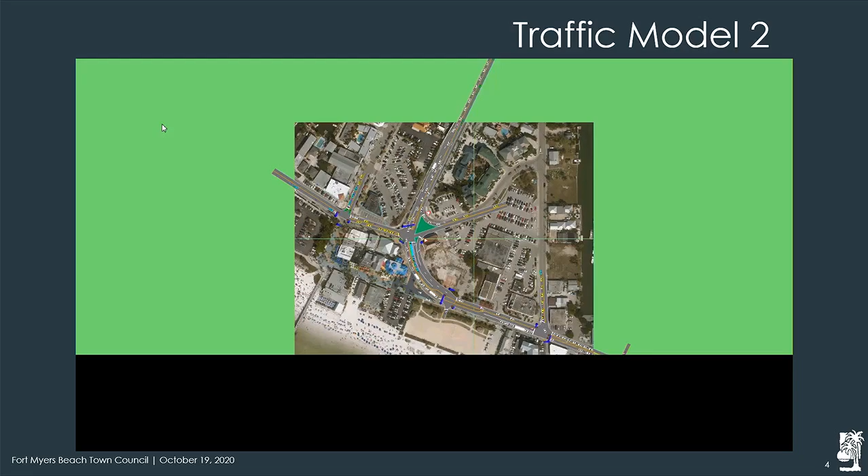The third model was what we called a beach oval. It was the model that seemed to work best given all the circumstances and the traffic volumes we put into each of the models. You can see it's split onto the Seafarers property. Could you explain that one in detail? I don't think we can see it, and I doubt the people at home can either.

That model breaks out the off traffic leaving, with a new light that splits the traffic leaving the property. Again, that model splits the off traffic leaving the beach off to the right through the Seafarers property, and traffic coming onto the beach goes around there. So it leaves kind of a big infield in the middle, and with a new traffic signal scheduled at Crescent, a new one at the base of the bridge, and a new one at San Carlos, Old San Carlos and Fifth, we can coordinate those three traffic signals together and keep an eye on everything. This model seems to make traffic move the best of the three models.

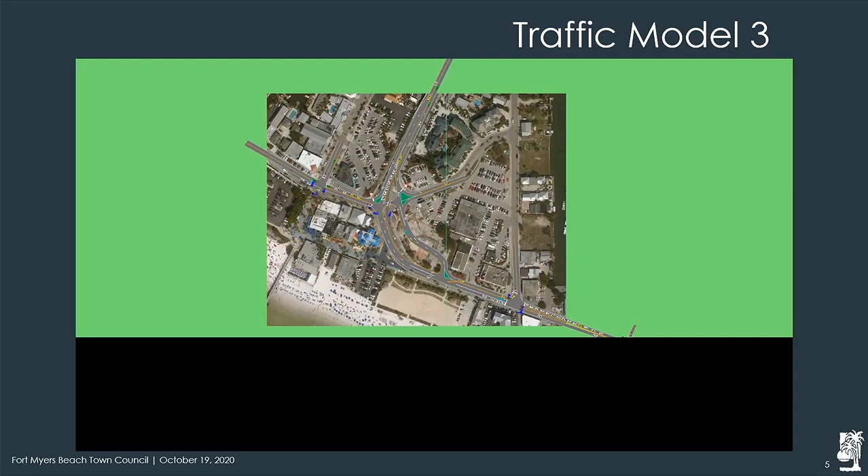With the modeling that we just showed you, it gives you an area in the infield there, some kind of landscaping, some kind of beach landscape. And again, FDOT has this backed up a little bit. They've made some minor changes that you all get a look at, and you'll get to comment on here directly.

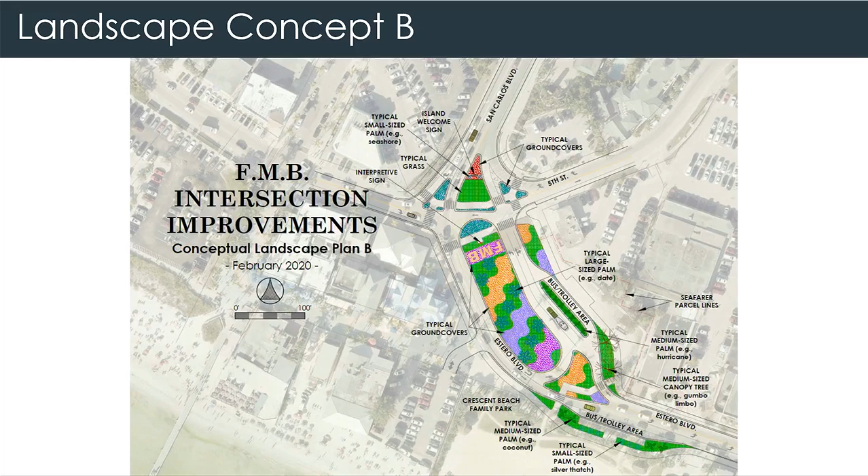This gives you a landscape potential for the middle there. You got another - these are just what we put together as potential landscape options. None of these models that you just saw will work in first season peak hour. The one that works best the other 10 months of the year was the one that we showed you. I don't want to get you thinking that one's going to work.

However, I do want to say that what FDOT's doing - if you remember the PD&E study they put on to show everybody - they've chosen one, which is what we took and made that model around, and then they've chosen what they call Island Alternative 2. So FDOT's going to come down and build this oval, but it's going to be part of a much bigger job.

We're going to start at the Hurricane Bay Bridge, the other end of San Carlos Island. We're going to restripe that, narrow the lanes to create a pedestrian path on what would be the west side there. They're going to get rid of the metered signal at Buttonwood and make it meter only when necessary, only in peak hours, and it will operate just like a regular signal the rest of the time. We're going to add a new signal at Main Street.

We're going to widen the Matanzas Bridge to the west side and add a bike path across that bridge. We're going to restripe the bridge to 2 lanes on, 1 lane off. We're going to redo all the roadway lighting. Then they're going to build that oval that we just looked at, that everybody agreed on, at the base of the bridge, again with a new signal at Crescent, a new signal at the base of the bridge, and a new signal at Old San Carlos.

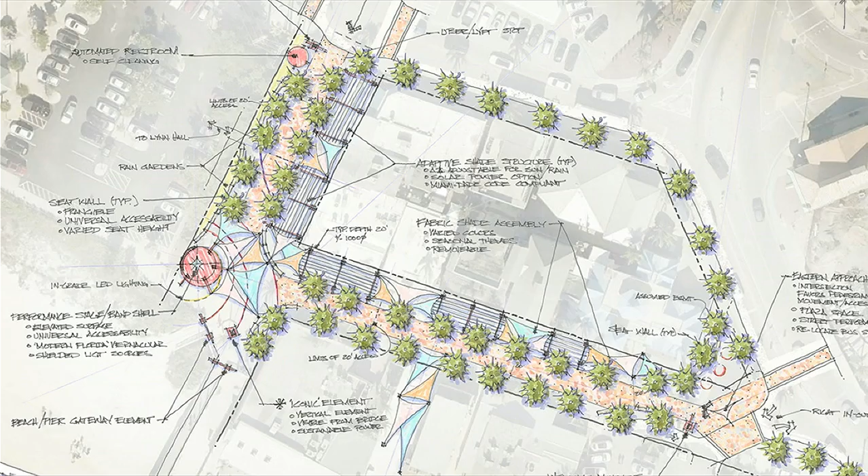So a closer look here, some aerials. This was the original concept plan that we came up with. Man, it's been about a year now. We've got the shade structures, the shade sails, the landscaping, hardscaping. And we'll talk a little bit about this area down here with the parking coming off of Estero.

The seat walls, we've got the hardscape shown in here. While we're talking about the hardscape, absolutely, we are going to make the drainage down here much better. If you can see along the tree grates here on either side of these two boulevards, you're going to have trench drains. We're going to take all the water in from both sides, and they'll run out. We're oversizing the pipes and pushing it down to Estero.

Just to clarify, I think you mentioned before that these louvers over the seating areas actually close. Yes, if that's what we end up purchasing, that's what we will do. So that's an option at this point. I think the way we presented it was that they do articulate so that you can pull shade in. As the sun's overhead, they're flat. As the sun sets, they kind of go with the sun so that it always creates shade underneath.

And then in the event of a rainstorm, they can close. Alternatively, they could just be solid and open, depending on budget. I don't think it's going to be an issue. We've priced this thing out with the articulating louvers, so I would guess that's the direction we're moving, but at the end of the day, it's what the bids come in at and budget will allow.

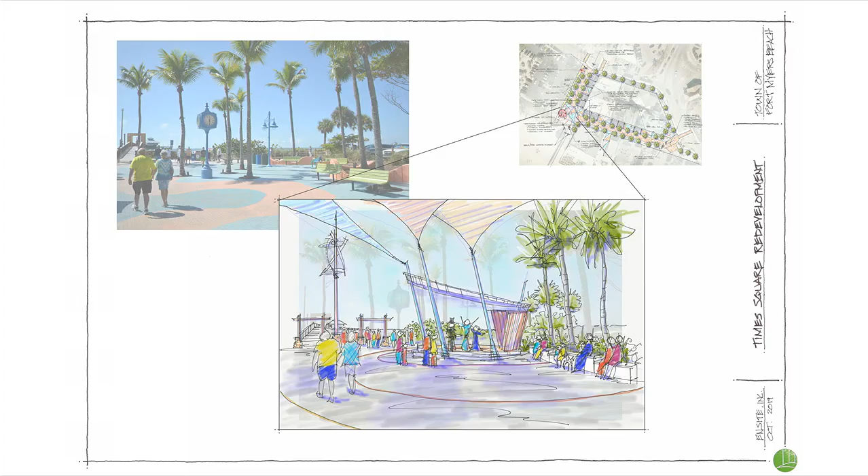Paul, I think what's clear is that one button turns them all closed or all open. Right, yeah, they're all individual. There'll be sections, and one section could be open and one could be closed. Sure, it could be wired so each individual store could have their own button to put it up and down.

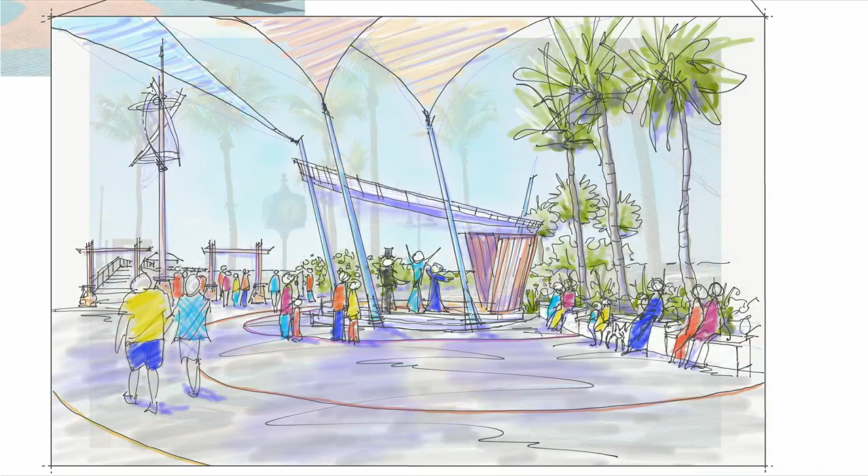Absolutely. Right. Yep. So this was, again, some of the original pictures we've got. We'll zoom in here. This is the dock area looks like right now, with the pier approach in the background. Again, this is before the new approach was built. Then we moved to this artist rendering here of what it might look like, and then a more computer graphic version.

So what I'm saying here is the progress we've made thus far: we've got actual three-dimensional shade structures, shade sails. The stage is all but final design, ready for construction. And we've actually looked to make sure that all these columns line up with those businesses, so you have good lines of sight coming out. We're not putting columns directly in front of your doors. We want to make sure there's good ingress and egress.

Again, we talked about the safety of this area going back about a year now. These are 20-foot wide aisles between the trees so we can get fire trucks down in the event of emergency. And we'll have removable or collapsible bollards at the ends to allow emergency vehicles to come in, but also to restrict traffic on the pedestrian aisles.

This is another view here for scale. There's the FMB sculpture, if you will - it's an FMB logo there. Another picture that shows that a little later in here.

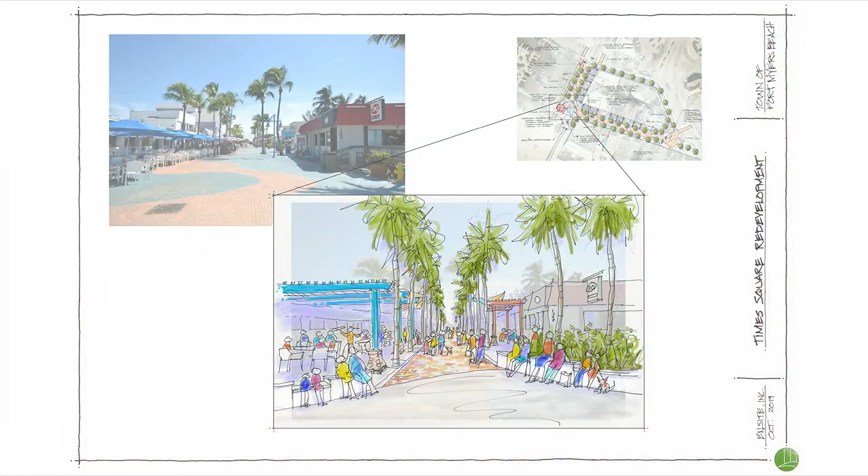And this is what it looks like now. That was the artist rendering. This is where we're at with our model.

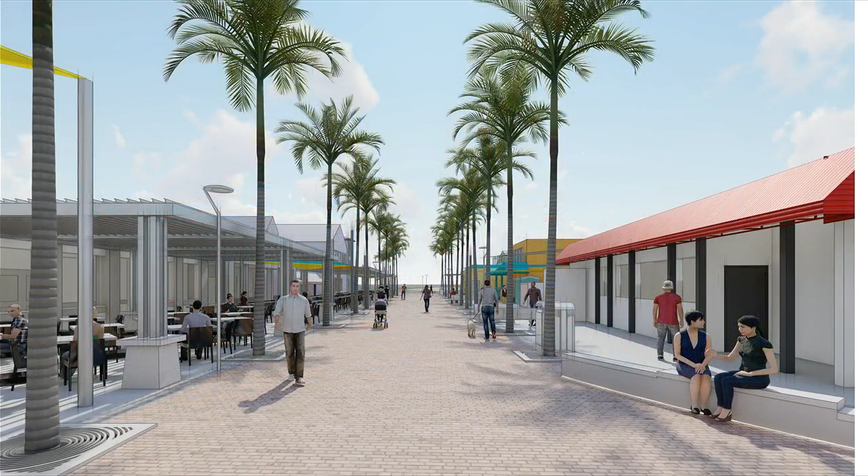The seat wall that we discussed, if you recall, we put it at varying heights so we can accommodate people of all sizes and abilities, and they're also spaced out so that you can't really lay down on them.

Elevation changes. Things to look at here: the lighting, that's definitely a concern. These heads have multiple color temperatures, so outside of turtle season they'll be brighter and whiter, and during turtle season they'll be that amber color. Those can also be on a timer schedule over seasons, so you don't have to go out and change a bulb. There's just a different LED panel that is on and off.

On this shot here, this is just a question. I don't claim to be an architect by any sense of the word, but where the main sail, the FMB sail is, the base of that is square, the stage is round. Seems odd, it just doesn't... is there a reason why that's square and not circular to match the stage? I'm not an architect either, I'm on the engineering side. We design around what the architect wants. I can definitely throw that out there as an opportunity to change that.

To tie in also to your question, the black band, the crow's nest look there at the bottom of the sails, that's round, and that would have the time on it. I think we talked about having different messages, maybe Happy New Year, Happy St. Patrick's Day, etc. So that's a variable message board that you can put some different messages onto.

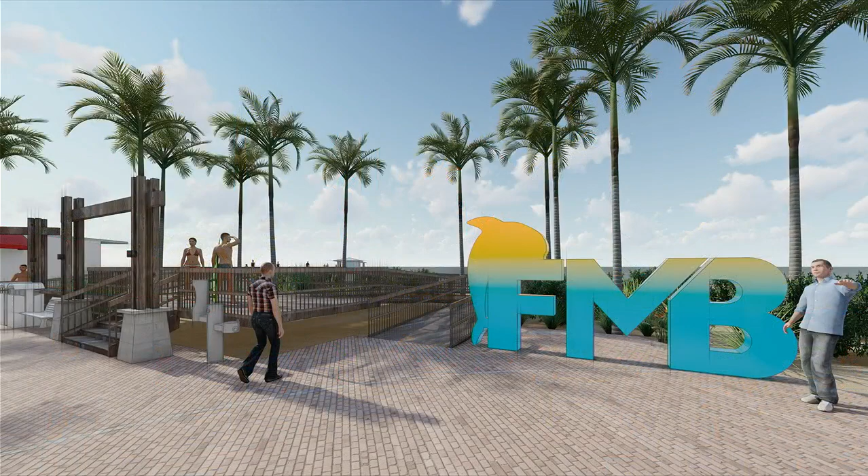Again, for scale, there's the FMB logo at the new approach to the beach. One thing we've done too is you're out there right now, you see there's a big slope coming off the pier and going down towards, say, Plaka or down past in front of Dairy Queen. Actually elevating that up a little higher than it exists now, maybe 8 or 12 inches.

That way we can get that view back. I'm sure you guys have seen the view has been diminished with the handrails that come in from that new approach. So we're trying to elevate that ground up, and then what that gives us is more ability to slope down into the drainage, so we're going to get more positive drainage out of this.

If you could just stay there real quick, that FMB structure, that's an optional structure at this point, obviously, right? Yeah. Because does it impair the view of the ocean to some extent, or is it? Well, I think we have another view here. So this was kind of the question we talked about earlier. Does that stage certainly add something to the... It adds something, but you can see through it. There's the FMB logo. This shot is taken from about 5.5 feet tall, looking out over the horizon there.

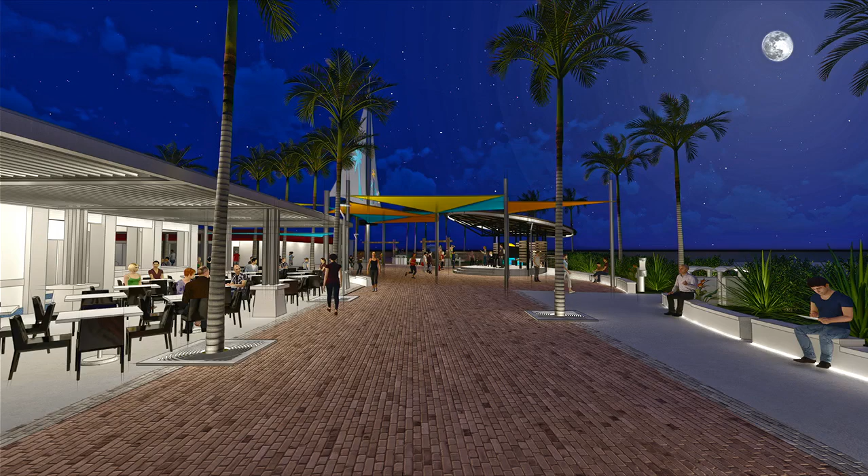Here we are looking maybe halfway down the street, down Old San Carlos. That's what it might look like at night. Is that showing? Looks like there's lights inside the band. They have an LED strip inside.

Will the toe kick lighting along the seat wall and all the uplights also be color changeable like the overhead lights mentioned earlier? They can, if they present an issue, but from what I understand, because they're uplights and not a direct source, they don't need to change.

If it's a direct light source, the turtles get confused and think it's the moon, whereas if it's a splash of light, an indirect or diffuse light, then it's not an issue. It almost looks like that circular light around the stage is being used to illuminate the stage.

I could see a potential problem with it causing an issue with the turtles. Right, so it could change color temperature. Those can change, yes. I do think any kind of white light glow can disorient the turtles, because the moon isn't always really visible when they hatch—sometimes it's behind clouds or something like that.

I do like the trees, and we have to take public safety into consideration. When you talk about the color temperature of these lights, it looks nice and warm, but it could also be a trip hazard if too dim. Conversely, with the dining area, when you go out to dine at night you don't often have bright white lights—fluorescent lights aren't sought after in dining areas, so a warmer light is usually what restaurants use anyway.

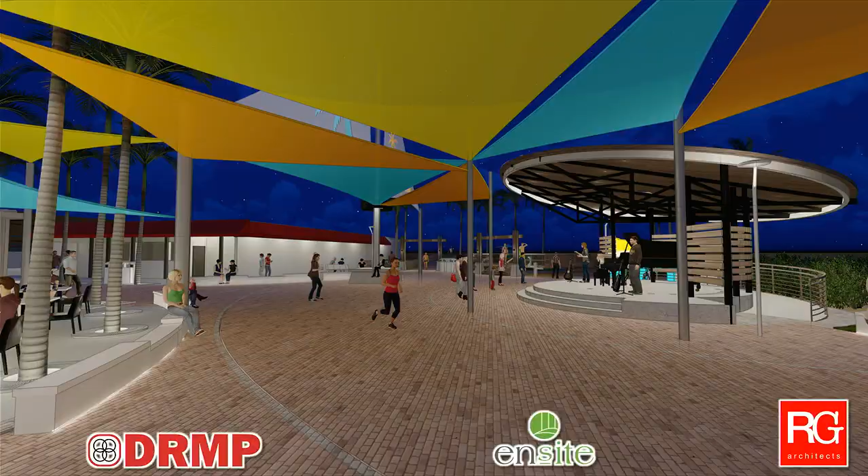Okay, Paul, are you done with the Square? Yeah, I'm good with it if you guys are good. So that's just the update there. Yeah, let's just be clear. So later in your agenda, we have an item to move to the next step. The thing we didn't talk about was the parking situation that one of the gentlemen brought up. So let's just address that now. Sure, actually, put that back up. Sorry, guys.

Back to Times Square. So real quick, I'll just talk about it. Our original artist rendering showed pulling that out. We're providing parking through the driveway to the parking spaces to the south there. Right now you have the trolley stop here, and vehicles come in and out through here. You've got vehicles coming into this parking lot kind of haphazardly in and out, and then you've got three spaces here. The original concept was to try to pull all of this out and make this more of a pedestrian area. We're going with that until we could...

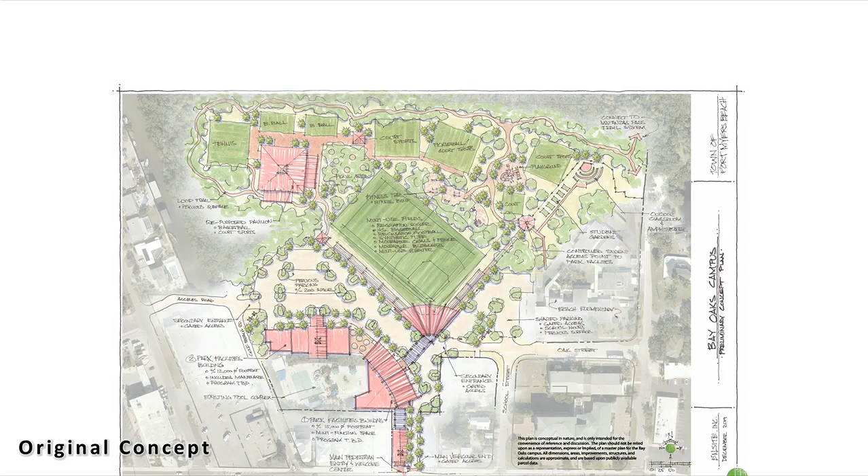We're going to show how we kind of walk through some things here. We have a couple of buildings that were looked at: one's a community-oriented building, and then also an athletic building, maybe a gymnasium, replacing the old recreation center. Some of the key things here also were the amphitheater, the multi-use field, the trail, the sharing of the property with the school, the outdoor classroom, and things like that. So also there's an entrance off of Estero. This was the second concept that we came up with.

We looked at moving the small baseball field over. There was some conversation about that, and then we looked at pricing on this thing, and this thing was way out of budget, if you recall from our last meeting.

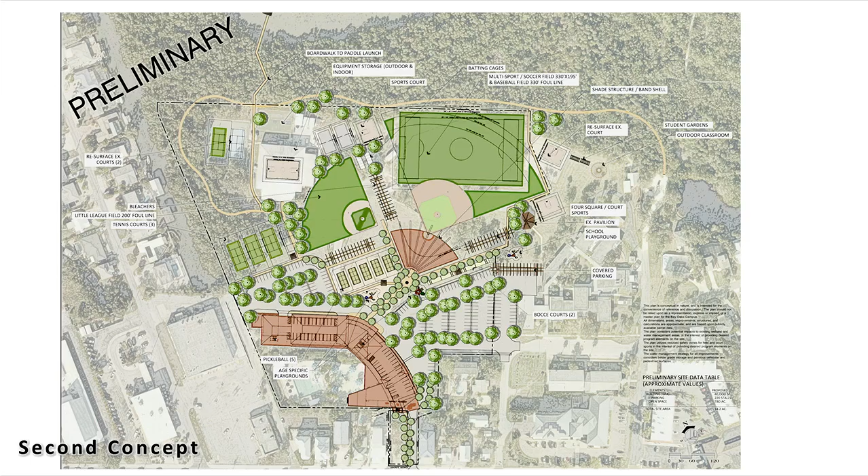So what we did here was work with town staff to make a modification. We took away the other two buildings and combined them into one. So instead of having an athletic building and a community building now, we're basically keeping the athletic building and the existing recreation center, and having the community building and the amphitheater combined as one for construction and budget efficiencies.

We have a roundabout in the middle to try and slow traffic down. We are still looking at having the entrance only off of Estero, and then also the egress off of. And this is where we're at from a CG rendering for this building.

What's the square footage of that building? 14,000 square feet. Will there be anything on the first level? Yes, there's a concession area and restrooms.

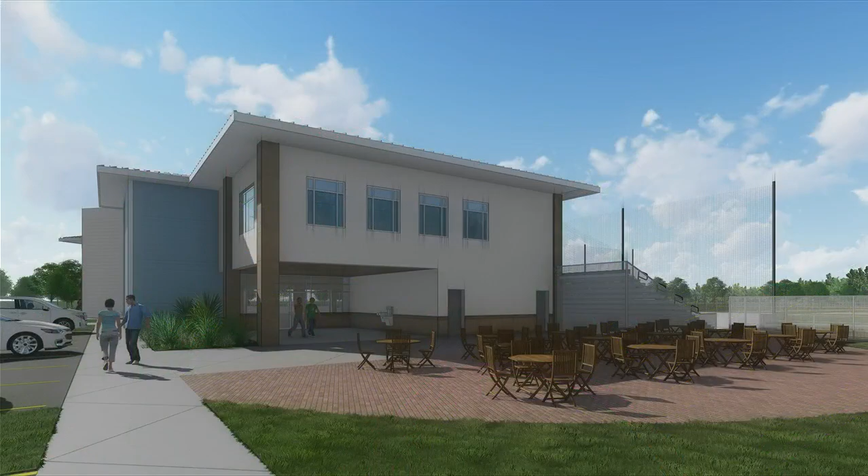Is there any storage for the Little League? They've got a lot of storage facilities now. Is any of that built into this building? What we have existing stays. Oh, the existing? Yeah, for this phase. Really? So if you could go back and point where that would be? Yeah, so the existing Little League is back. Wait, are you talking about the storage for the? Yeah, it's underneath the back.

You're trying to say the existing concession stand and storage that they're using is staying? Yes, that's all staying down there in the bottom. On this one, there is room for concessions underneath and bathrooms. I guess I should have brought the floor plans, huh?

Before you go on, one thing you said before is you're looking at an entrance on Gulf Beach Road. Yes, and there will also be an exit. Ingress and egress is how we have it. Even with the traffic circle during season, people are going to know that they can bypass the Estero traffic by coming down this way if you have an exit on that side.

Right, we're looking at access control issues. As you know, the current exit is a removable bollard, so we're not locked into permanent open access there if that becomes an issue. The FMB sign down from Times Square - there's opportunity here to adjust that parking area and the path through it. I would tend to want to leave it as designed here, and then if it becomes a problem, we can address it.

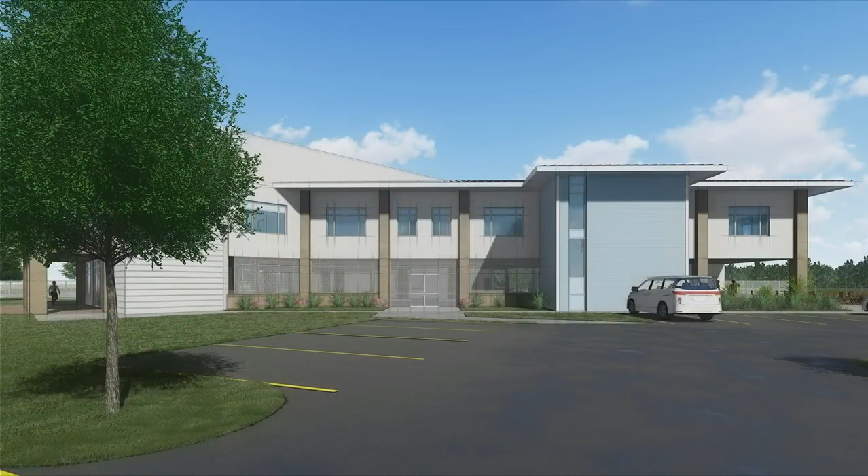So really, the questions we had for everyone here is the architecture of this building. There are some options to look at. Talk about the programming - it's got flexible space, it's got two wings. One's more for younger kids recreational stuff, and one's more geared towards adults recreational activities. They're separated by a wide open area, and what that does is keeps the noise down from one to the other.

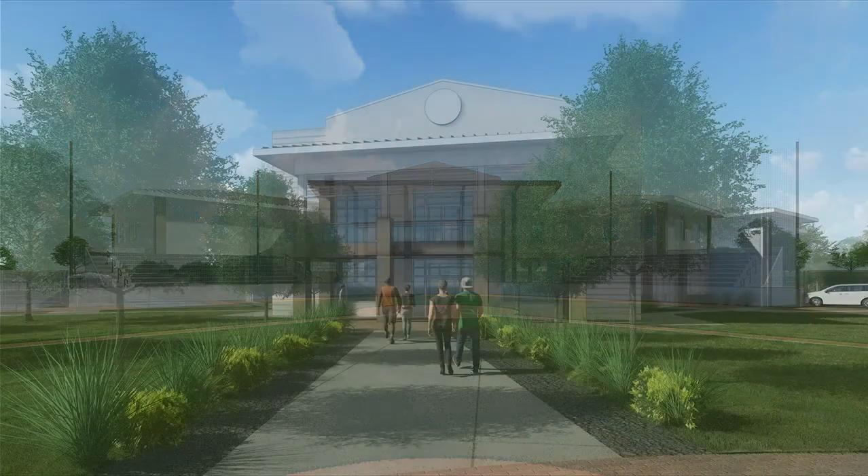What the building might look like from the back. Looks like Terry Park. So where we're at right now is, this is an odd one that we're looking at here as an option.

I'd like you guys to kind of weigh in on what direction you might like to go. This looks like a Greek temple - you've got a round sun there. I think it would have the logo on it or some variation of that, maybe. This is more of a dome shaped, looks more like an airport hangar. And then we went with more of an offset, asymmetric version, and that tower there is actually what houses the elevator.

The elevator exists in all three floor plans, it's just getting a little bit funkier with the design here. The cost is essentially the same between them. Can we see those three again?

We had originally a aluminum or metal roof going over this thing. We opted for a flat concrete roof instead. You'll be able to see it better in one of these pictures here. So this is why we're kind of showing you that facade that you might see from the ground.

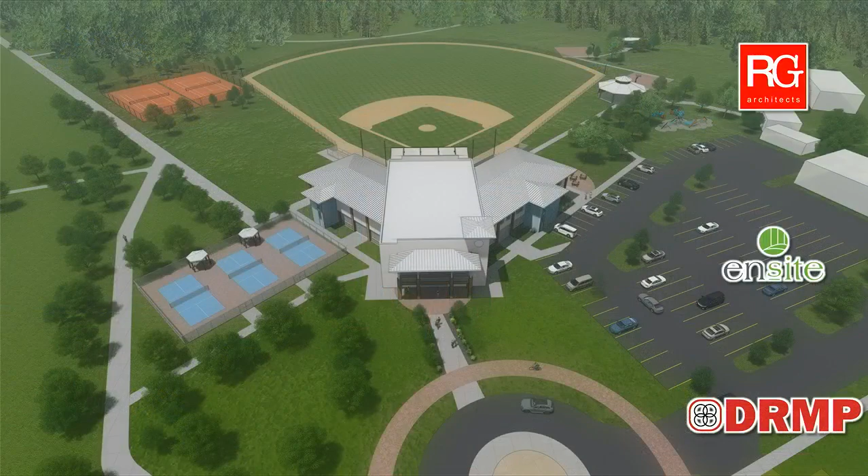Why did you choose that flat roof? Waterproofing, and it's a little stronger in case we wanted to use it. We wanted to set this building up so that we could stay there on a floor if this building got damaged. Generally you don't use flat roofs, but we wanted to create basically a concrete structure within the structure so that we had some continuity of services if this building were to be damaged in a hurricane.

I think the entrances are all, it's like you're walking into a mini stadium there, Hammond Stadium, which is very inviting. I don't know, the council can decide. I prefer that one myself, the asymmetrical one, with the elevator shaft on the side.

One question, I don't know if you've been part of this conversation, but where the arches are, there's some of this old coquina stone. Is there any way from your standpoint to incorporate that in a way that does not become burdensome from a construction standpoint? I have not seen the material. I heard it's stored off island. I think it would be cool to see some of that historic material be reused somewhere. It's not something we've contemplated at this point, but with direction from council, we can.

The bases at Times Square, right, that we use. I don't know if that could be used there, but the idea, not the actual stone, but the look. There's a similar look to all the pedestals at Times Square. I recall the original design from some time ago. I can pull it up again if you want to see it.

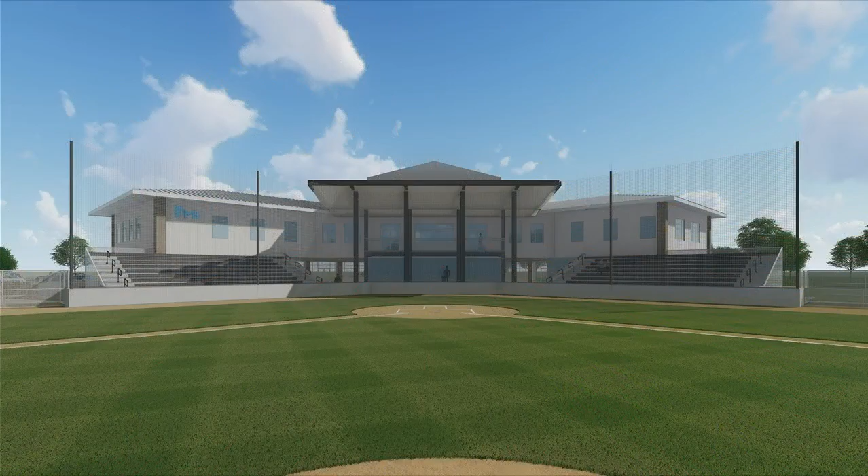And you mentioned BORCAB. Has this information been disseminated to the BORCAB group already? No. So we went through our 30% submittal with town staff, and then we paused until we can get movement to move forward with the next phase to bring this thing to 60, 90, 100% plans, construction documents. This is the first time I'm presenting it outside of that 30%.

We're going to 60 on this one. Is that right? That is the next step. The supplemental task authorization for you now is to go to 100%. They'll have a crack at it. Yeah, those are built in there.

I think it's important to understand how these projects get done. We welcome the input, but we're basically at the stage where people see it at 30%. Next stage is 60%. Everyone, all the stakeholders, will see it again at 60%, see it at 90%, and then the final plans. We don't really go too much in between those 30% bumps, because if not, we'll be fighting over the shape of the doorknobs forever.

Just to summarize, we wanted to set up the building so it really would be the community hub—someone who says, I don't know what I feel like doing today, could go to that building and engage with someone and find something to do. Not necessarily that you had to be going there with somebody to do something. That was the concept, that you could just go there and engage with someone, do some programming, or just sit down and play gin rummy if you want. So we're trying to create the spaces to be as flexible as possible, to create this community center of the town.

I'm sorry, Mr. Mayor. Paul, real quick—so when you were trying to get our input on the facade, and we saw that beautiful approach to the building, is that the space that's on Estero Boulevard as well? No, that's if you were looking from the roundabout in the middle of this picture here. What's envisioned for the space in front of Estero at this point, or have you decided?

Yeah, so it's going to be landscaped, and it's going to have this National Fitness Court. Unfortunately this is trimming my PDF so you can't see the bottom, but it's got that National Fitness Court there. We're contemplating shade sails, shade structures there, and there'd be monument signage. Really the nice thing about it is it shows where Bay Oaks is—Bay Oaks is a recreational facility, we're promoting healthy activities, and it's right there on the boulevard. You'll be able to see it and know exactly where to go to get into the park.

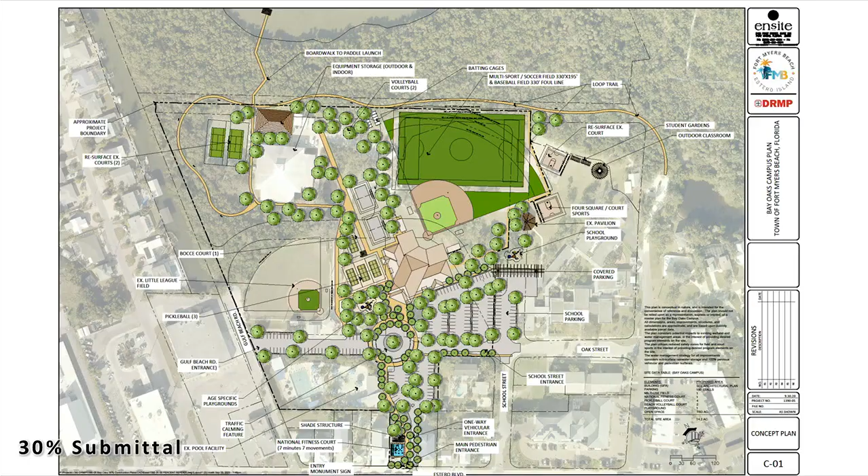Okay, Paul, let's move on. Did anybody care about one of these facades while we're here? Any strong feelings one way or the other? I think I heard the asymmetric one was Councilman Allers and the support for the asymmetric. I'd agree with that. I'm not going to argue with the engineer and a builder, but there you go. We'll go with that one.

So we'll move on to Bayside now. So, dramatic first page on Bayside, by the way, with the big red X. That was very...

We talked to everybody in town. We've heard lots of input from everybody around the area. We heard now where we stand is we want to have a stage area and shaded viewing space. We want to have native materials. We want to have potentially that rain garden and consistency with Old San Carlos and Times Square.

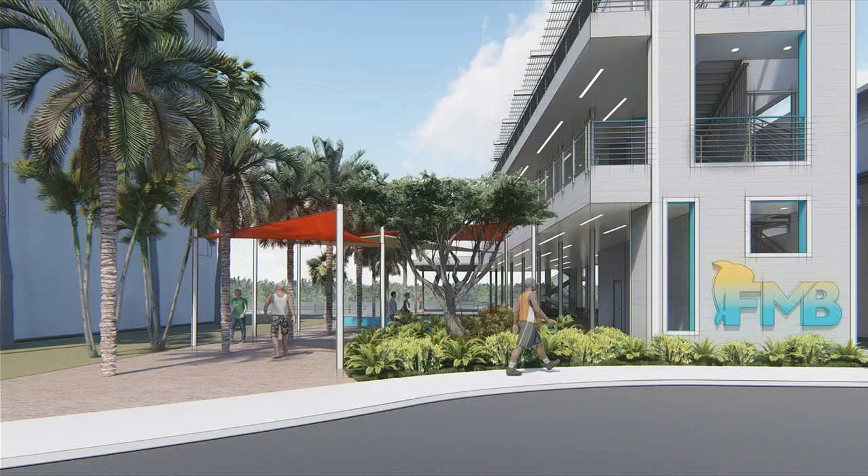Again, this is what that area looks like. Our original design, this was presented to the previous council. It had a stage, it had solar trees, a splash pad, and it sounded like we just didn't have enough to continue with that splash pad. We went to this design, which had a building which housed some of the upland facilities for the mooring field, shaded areas. We had a stage in the back, if you remember, and then that got killed.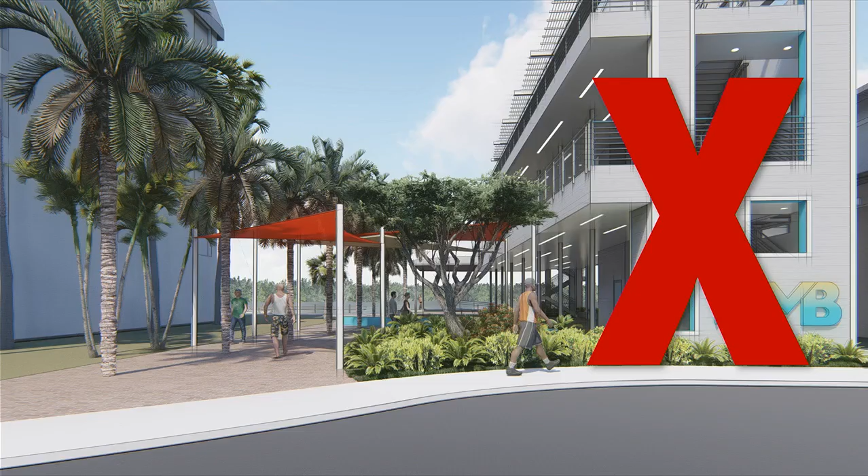Paul, could you go back for me to the original design that you had up there? Mention this right there, the one on the bottom left. I seem to recall that most people were in favor of that. Maybe not with the splash pad, but the openness of it, the tall trees, the sunshade - you still have the stage, but you could still see through there. Other than the splash pad, why was that eliminated? Why was that concept eliminated?

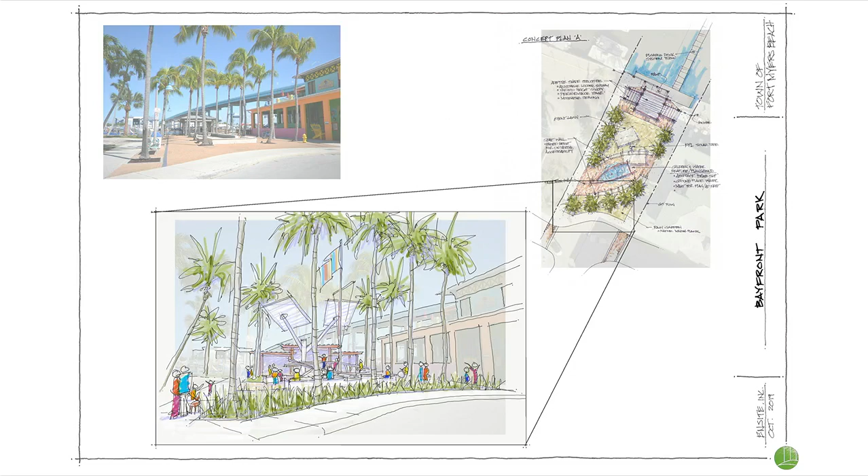So the reason why is because we got direction from staff to look at putting in the upland facilities building. We switched from this one to the upland facilities building, and at this point, what you see is approximately the same thing without that splash pad. It still has that rain garden up front, it still has the rows of trees. You'll still be able to see through from the street to the water. Depending on the size of that tree, if you allow the boughs to hang down, you wouldn't be able to see through, so you want to get a big enough specimen tree that has a trunk long enough that you can see under.

Clearly, that's our goal. One of the comments we received is to try to use something other than palms there. So we're looking at a tall enough specimen tree that you can see under the limbs.

Based on our prior experience with the fountain, and prior council talked about having a water feature of some type, we all came to a joint conclusion, consensus that the maintenance and things operating is prohibitive, and no one's really been successful at it. So, on a hardscape.

So underneath those trees there's going to be like a water garden? Rain garden. Yeah, so the rain garden is just the site funnels the rain, the runoff down into that area there, and has natural, xeriscape type landscaping. It's all natural, local species that want that type, want the rain to set on them, and kind of drains naturally through it. Then whatever excess would go off of a control structure there, and would go out into the grass. Basically, it's going to serve as the stormwater system for the parcel.

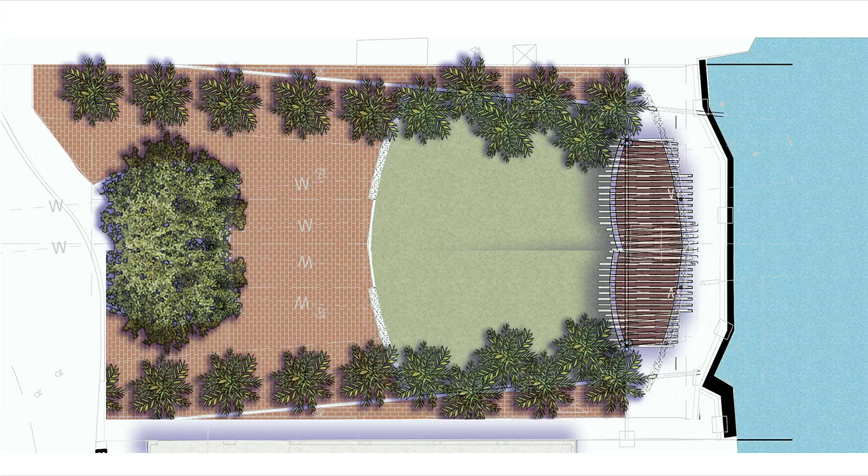I, for one, am inclined to have multiple ones rather than one - to have multiple markers that tell a story, so you walk from one to another and kind of see a story unfold. We're going to call on Allison and her exhibit experience to help us find something that facilitates that, so no one will just walk up and look at it, except maybe to tie their dog or tie their shoe. We want it so that people would actually come in and see a story. If I put the whole story on one board, it gets too big and massive, so we're thinking of a couple of them, so as you progress, you chronologically get the story.

We do an excellent job of that at Edison Ford. So it would be something of that nature. One of the things we discussed, among the options at CRAB, was to have a fairly general memorial, but then as part of that storyboard, tell the local story of the involvement - like the Watchers during World War II, and the role people on the island had in the military.

One of the other things is you don't want to set it so that it's five and only five. We might start with five, and who knows, in the future we might add a sixth or seventh - that's kind of the concept. We want to build the space so that we could add those as time goes on, if we wanted additional features to tell more stories.